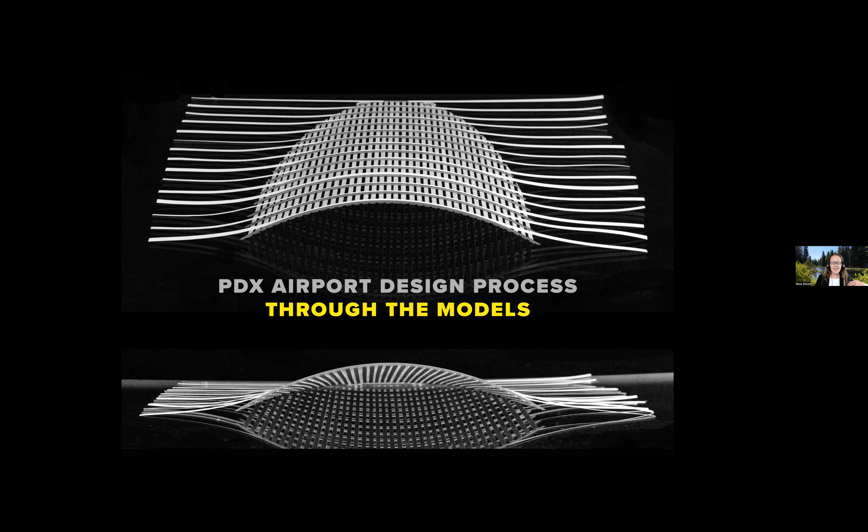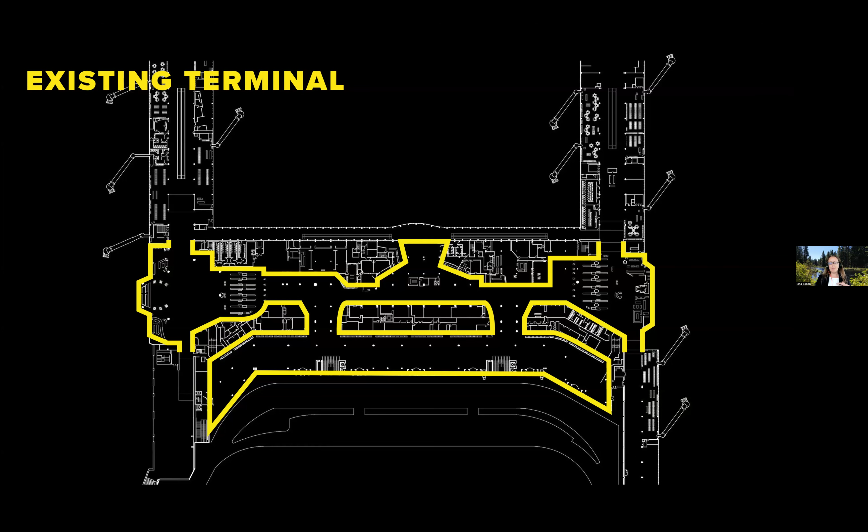The Portland Airport has been voted number one for a number of years, and the port really wanted to keep that status. So how do you take this airport that people really enjoy because it's intimate, it's got great food, and basically recreate the whole airport and add a significant amount of square footage? We were really tasked with keeping the intimacy of the existing airport and creating an experience that would reflect the region. So we developed this concept that is really a series of rooms that creates a sensory experience of a walk in the forest.

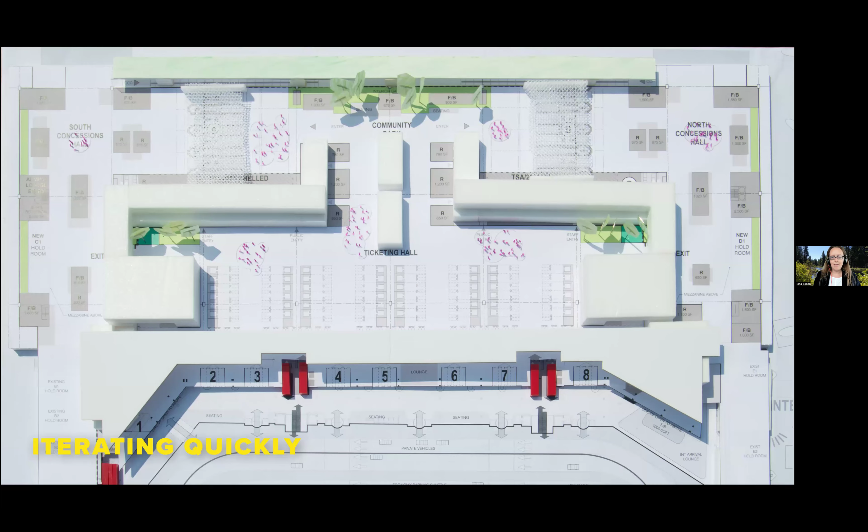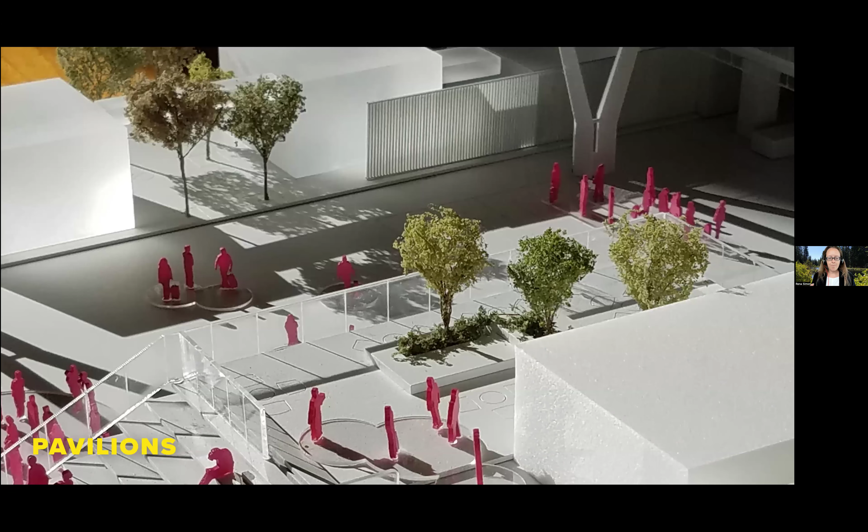We started with just some really quick iterative foam models, and we were using the program to define these rooms and look to our city, Portland, as a city of parks for inspiration of thinking about the scale of these spaces - Director Park, Pioneer Square. These really started to inform the size of those rooms. And also thinking about the intimacy of some of Portland's great streets and how the trees, the urban furniture if you will, starts to break down that scale even further.

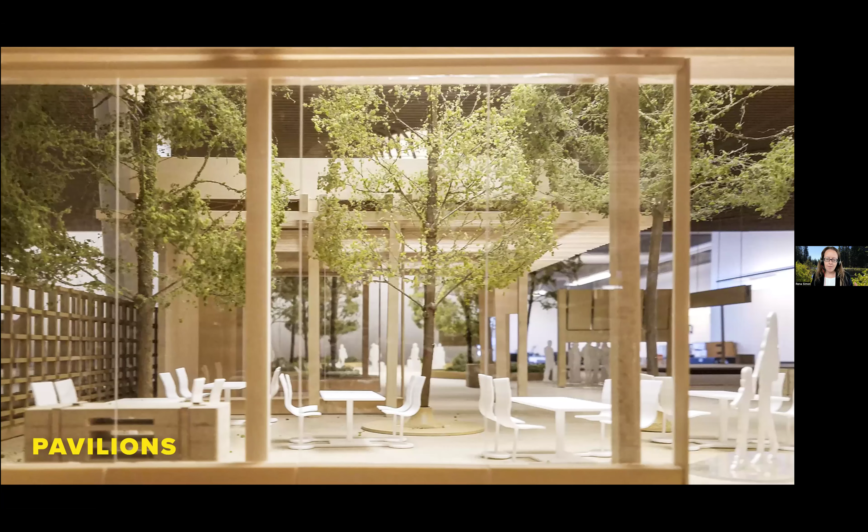And what's kind of fun, if you look at this model closely, it's actually doubled in size by a mirror. We only built half of the airport and used a mirror to create the full experience there of this kind of parkscape.

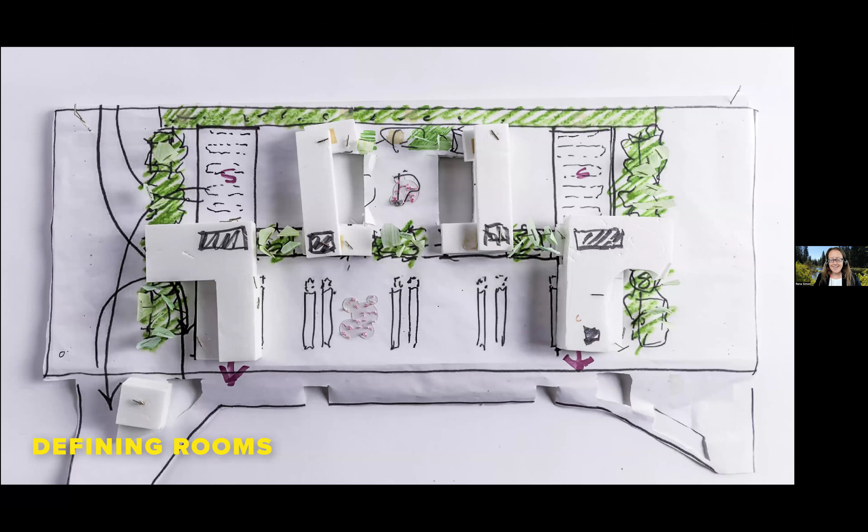But as we were working through these models, we discovered that this insertion of these biophilic experiences could also, not just define the edge of the rooms, but also start to synergize in its location with some of the highest points of stress in the airport - so security queuing, or even when you're trying to put your shoes on, coming out of security. So we started to define these rooms.

And something else that came about in this process was identifying this seam. No one's going to know what we're talking about now when we say the word seam, but if you were to figure out which words were most used on the project, seam was probably one of those. Really what it was is this threshold between the existing foundation and this new expansion foundation. That was a zone where we could bring up MEP systems, insert some of these larger trees, and really was this strong threshold we wanted to create between the room of the ticket hall and the room of the market hall.

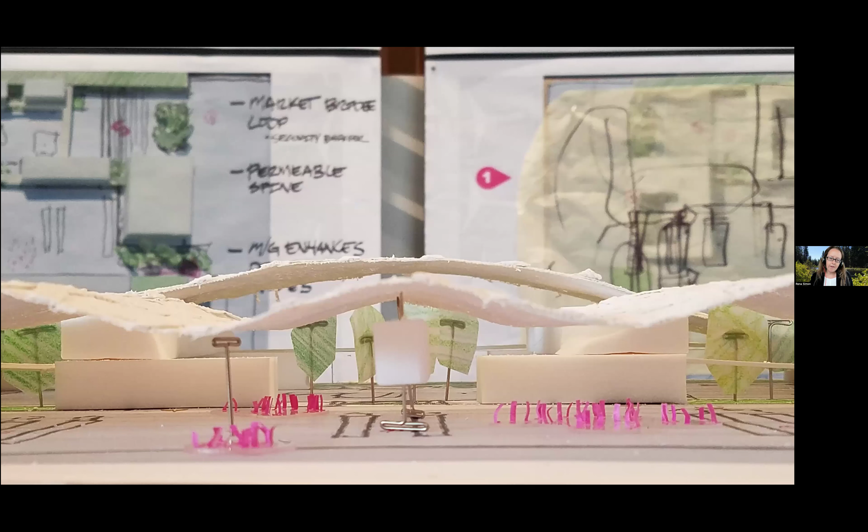But at this point, we're really just thinking, coming from the ground up, creating those rooms, and we haven't really begun to define what that roof experience would be.

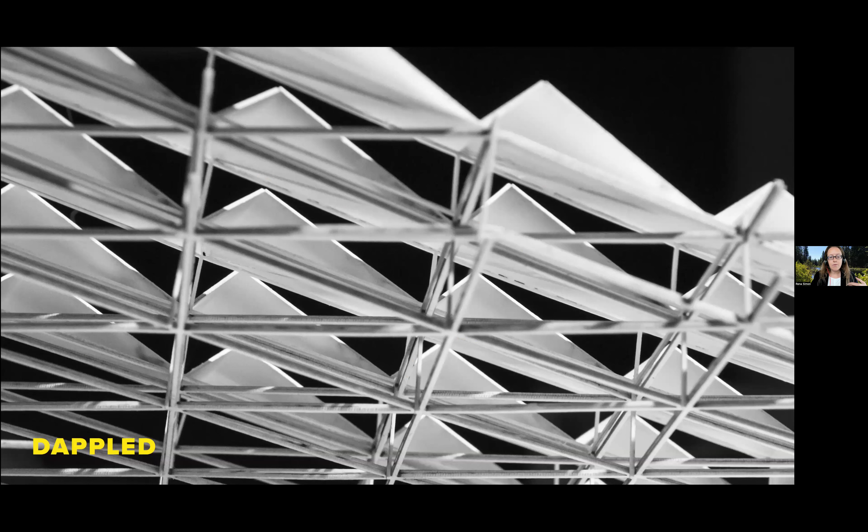So as we're starting to look at the roof and study its character, dappled light is really what we start striving to achieve with puncturing the top of that roof surface, and using these two-span systems to try to minimize the amount of columns that might have to puncture down through that haystack of stuff that needs to remain operational below.

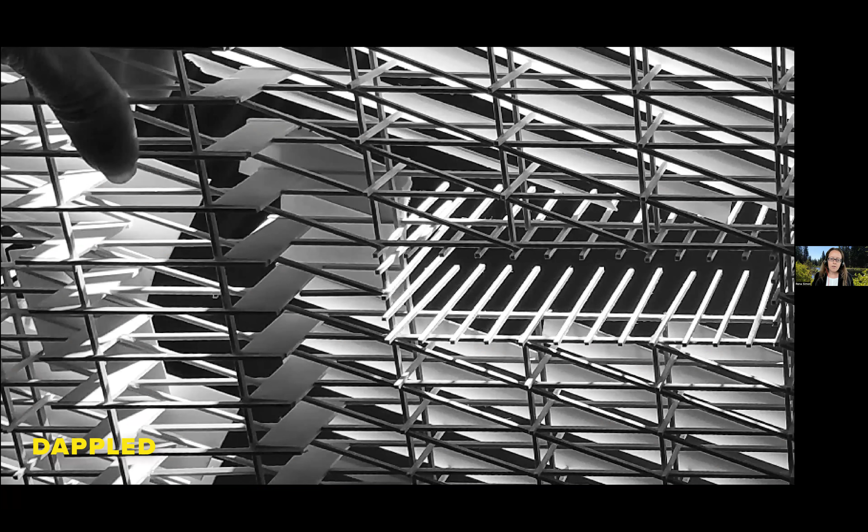One of the fundamental challenges with this kind of top side approach is that they were one directional. We wanted people to come through the ticket hall, and when you get to the market, then you're going to go right or left. We wanted that experience to be similar. So we started looking at concentrating light - not just having this blanket of dappled light fabric, but how could we puncture that roof more and create these moments of light.

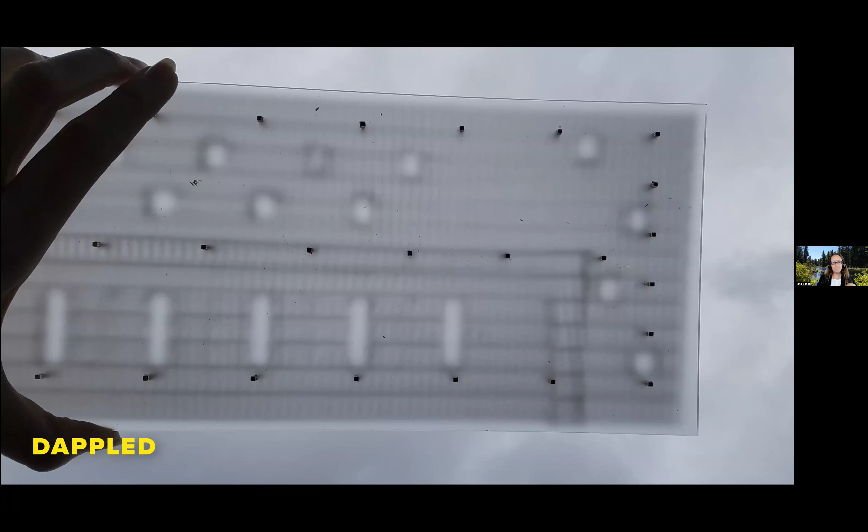And you can see here in this model that seam is starting to register.

The other challenge with that kind of dappled light only approach is that you might be creating measurable light in the space, but you're not really creating perceived light. So using surface to mitigate glare, but then also have this more visceral experience of light became really important.

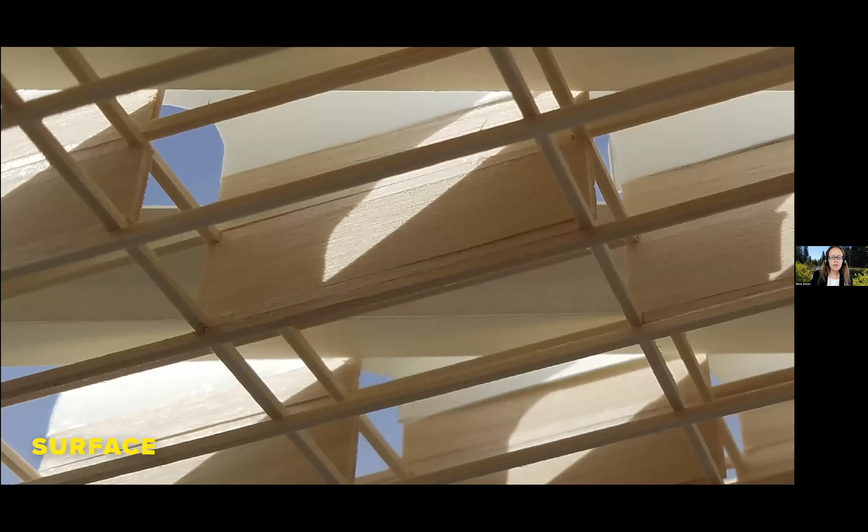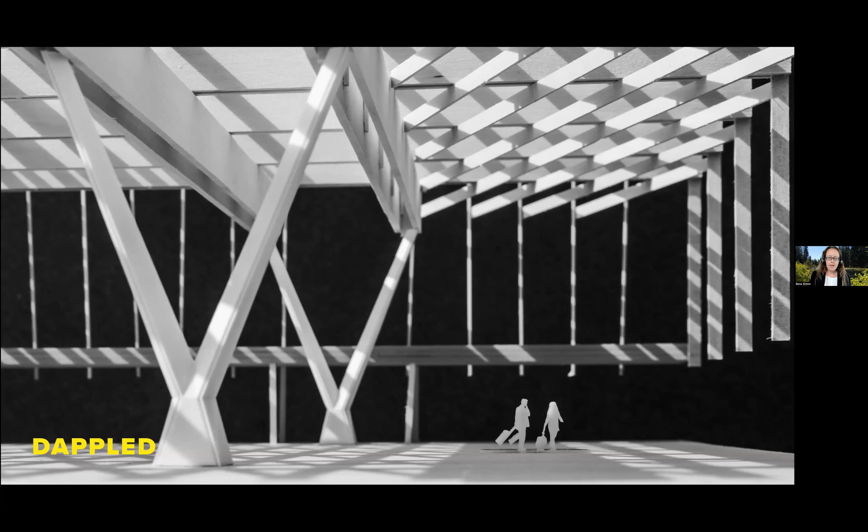So we started looking at bringing the clerestories down into the structure so that light could be cast on those surfaces, creating this dappled experience in addition to these kind of punctures of light, and even potentially integrating an additional element, so some kind of fabric.

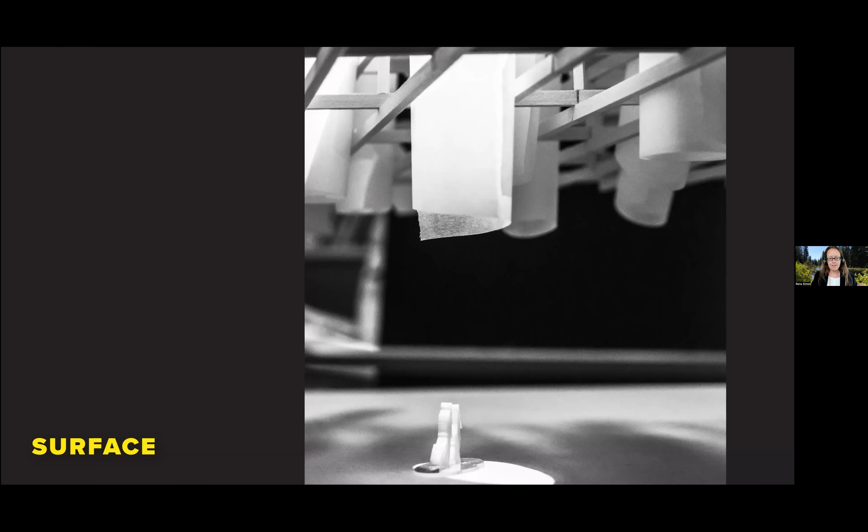We did a lot of iterations, just thinking about these light scoops. But in the end, you're adding these additional layers, it's additional cost. And so we started thinking about, is there a way that the structure could do everything all at once?

It could create these moments. It could also form the skin - so it could turn down and form the skin.

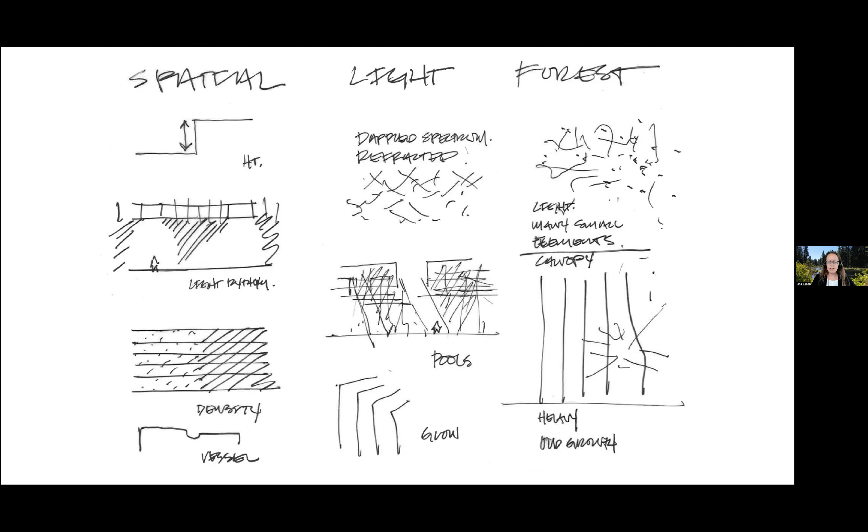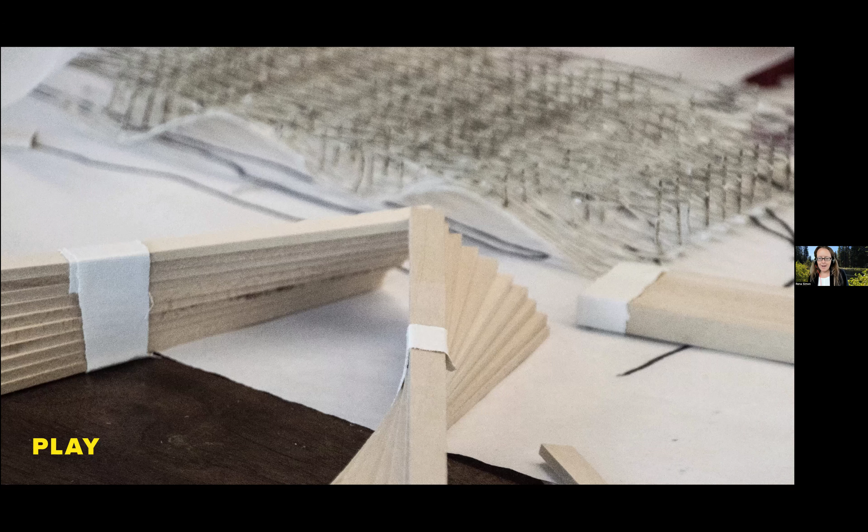So I want to take us on a little bit of a tangent here, where something I really enjoy doing is kind of setting up a framework for study and then just seeing what comes out of it. So this was just simply taking athletic tape and wrapping it around some basswood sticks and starting to twist and play, kind of twisting the glulam essentially, to play with light.

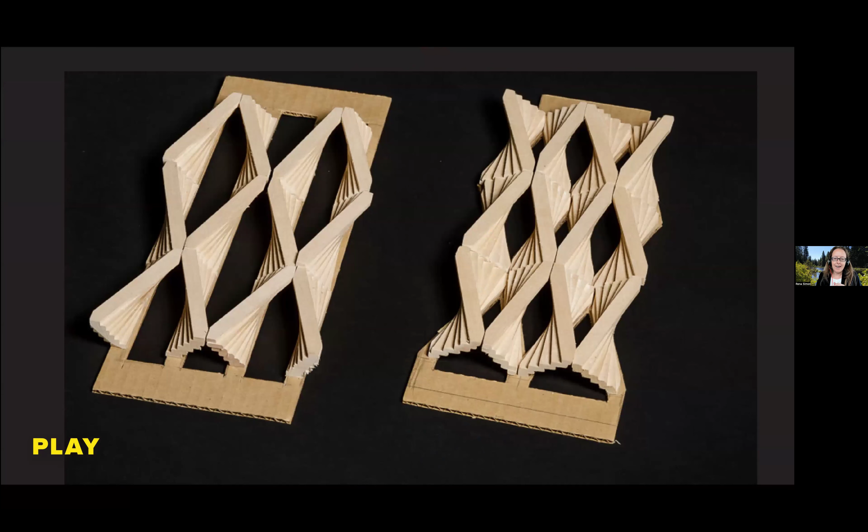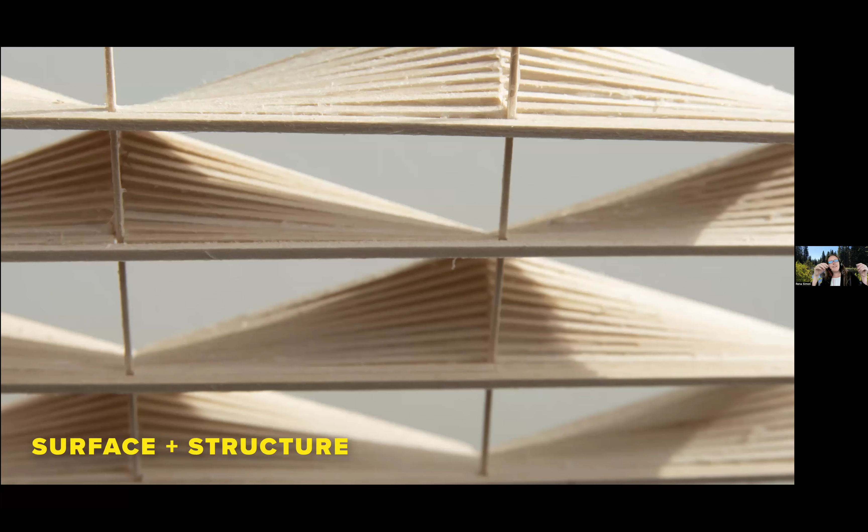But one of the beautiful discoveries in this was having this kind of structural rigor that could relate to the flow of the space below. And then with the axis of the airport being 60 degrees rotated, that top surface could twist and start to reference that east-west axis. And it was this really wonderful potential.

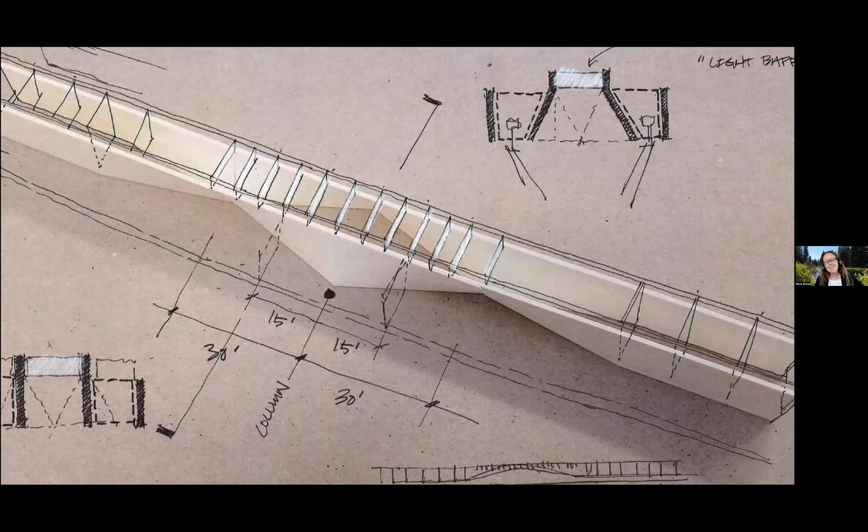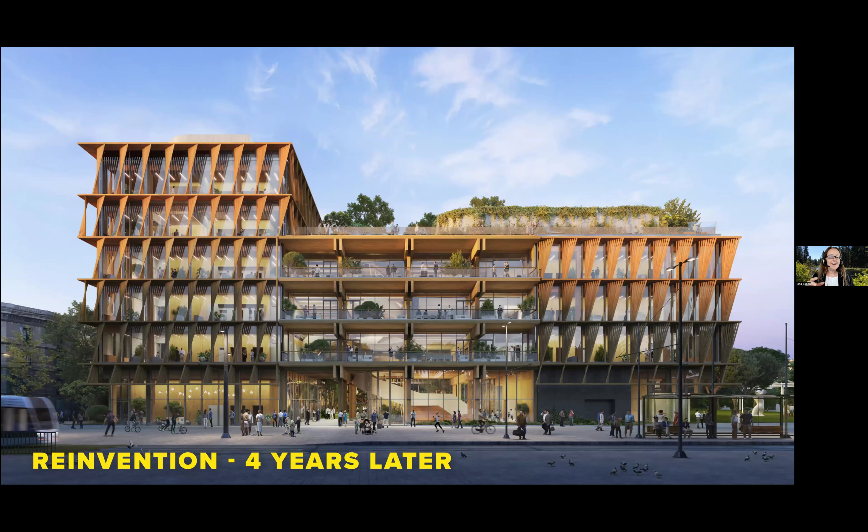And so we took it to the farthest extent we could to see if we could get it to work structurally. And in the end, we just couldn't get those laminations to function the way that they needed to. But this is one of those fun moments in design where an idea that doesn't go anywhere on a project resurfaces and you're able to kind of reinvent it on another project.

So this is a Barcelona project competition that we did a couple years ago. And so this model with this kind of straight edges that work with the building module, and of course it evolved to what you see here. But it's just a fun moment of where we had this kind of library of ideas to last a lifetime with this airport structure. So this is the first example of being able to use one of those in a new way.

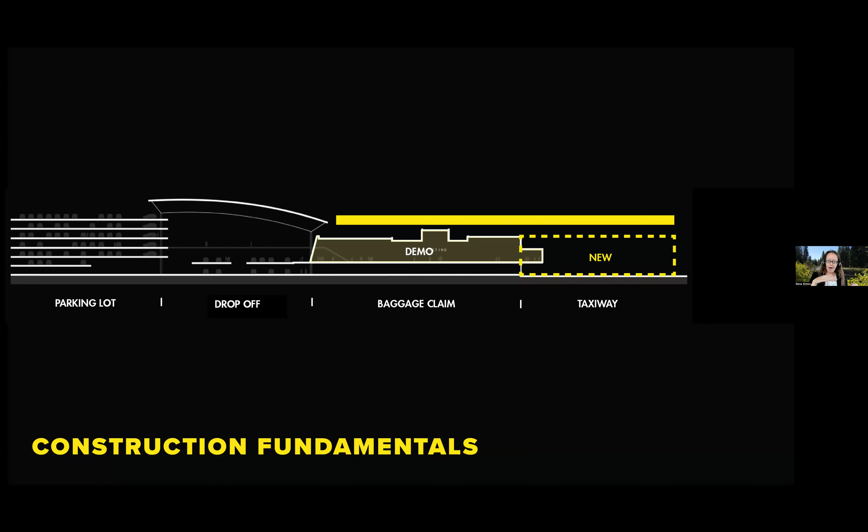So another way that we use the models was at a critical point when we decided that two-way systems weren't really going to work, in the sense that we were already kind of pushed, no pun intended, into a one-way system, having to launch the roof out over the existing structure. So this model started to communicate that - we could think of the structure as a series of cassettes that each get pushed onto these girders.

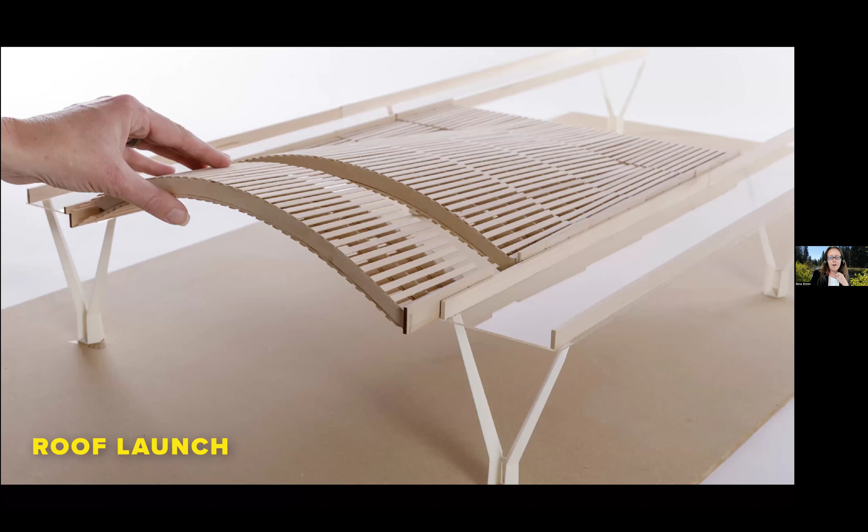And in the end, well, actually, I wanted to show how tattered this model was, because it was in almost every meeting. But in the end, we actually didn't have those smaller cassettes.

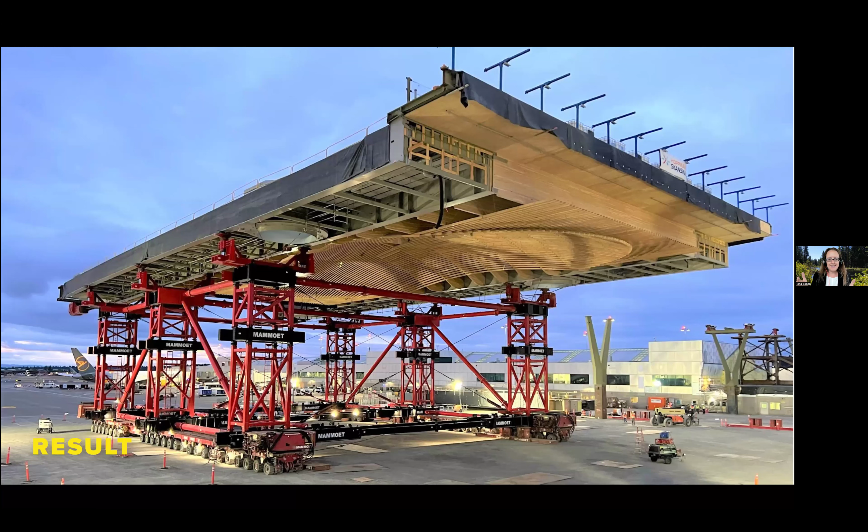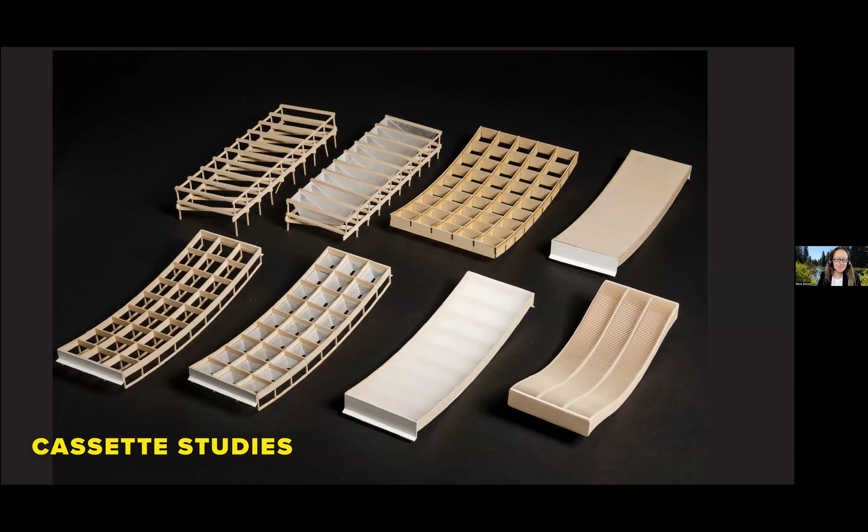We had essentially half a bay being launched at once by these Mammoet kind of Star Wars type structures. This Dutch company, they actually wanted to move the whole roof at once, but I think there were some challenges in getting enough trades folks out on site to actually get it all built in time to move it all at once. But I'm sure there's many other reasons too. But this started to set up a framework of the structure where we're starting to study these cassette modules.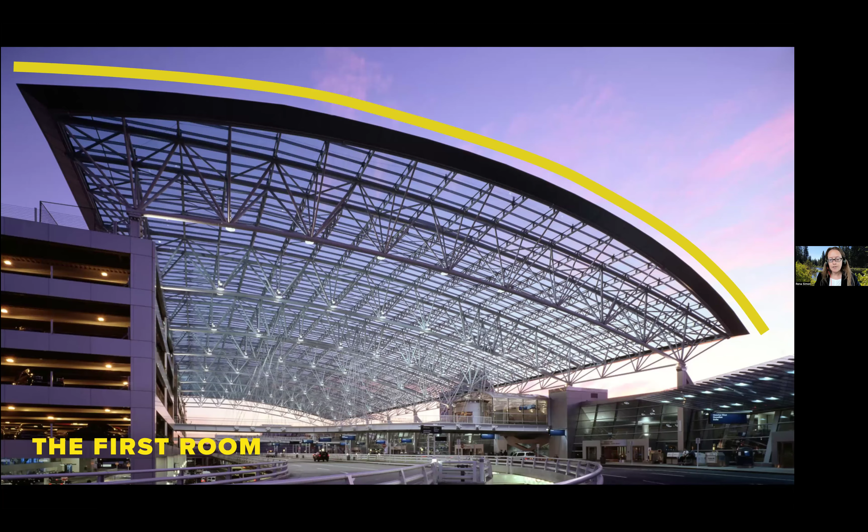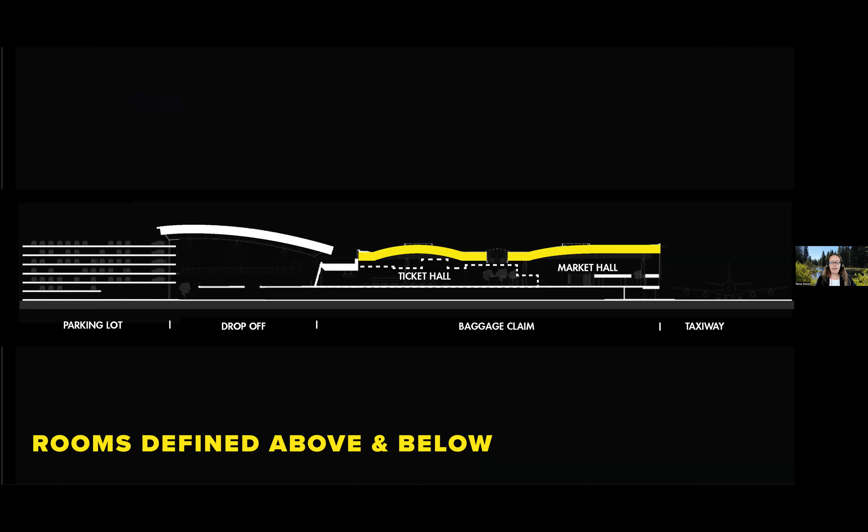And then really the first room that you experience at the airport is at the drop-off with the canopy. And the form of that roof was the inspiration to start looking at how the roof could shape itself, not just to deal with water or certain other challenges, but also to start to create that intimate scale. So starting to shape the roof to define these rooms.

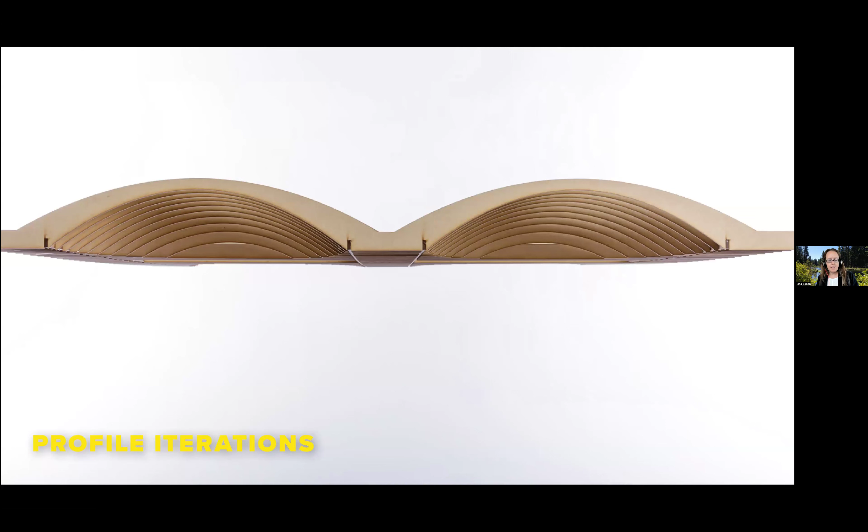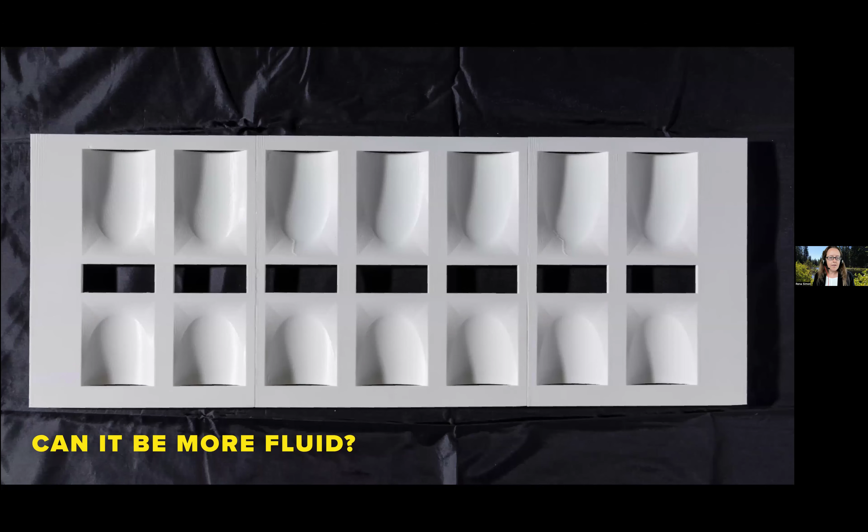And so we did a lot of back and forth between the computer and models to test the beam profiles and what were these forms that we were creating. And we had a presentation check-in with the port with these models. And the two main pieces of feedback we got is there was some concern about these vaults and the amount of light that would come into the ticket lobby. And there was also a question of, could it be more of a fluid shape?

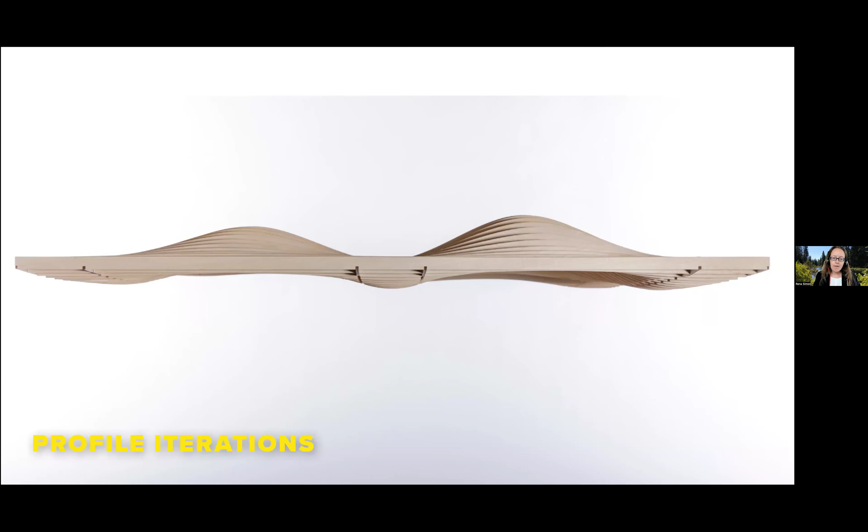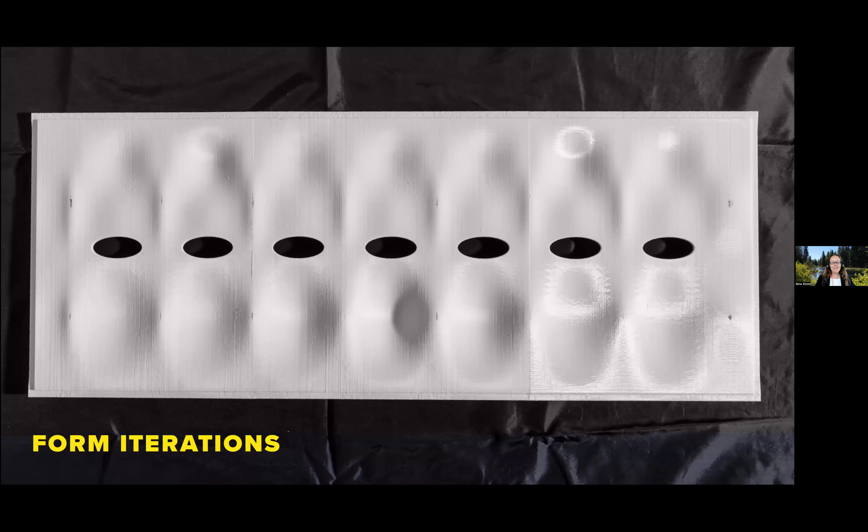So we started to iterate on that and develop this language of the domes in addition to these more vaulted open forms. And so we got a little wild there for a minute, going above and below the girder, and ultimately settled on these two kind of vocabularies of the vault and the dome to start to form those rooms.

And there was this moment in the process where there was some struggle to try to understand what that beam profile should be. And so this model did a lot of that work to kind of get the computer to fall in line with what we were trying to create. So this was just grabbing a giant piece of Plex that was in the model shop, and stealing a piece off of one of the older model iterations and just laying some strips of paper on top of it. So it became a kind of a pivot point where it felt like we were starting to test out the realities of what the design would be.

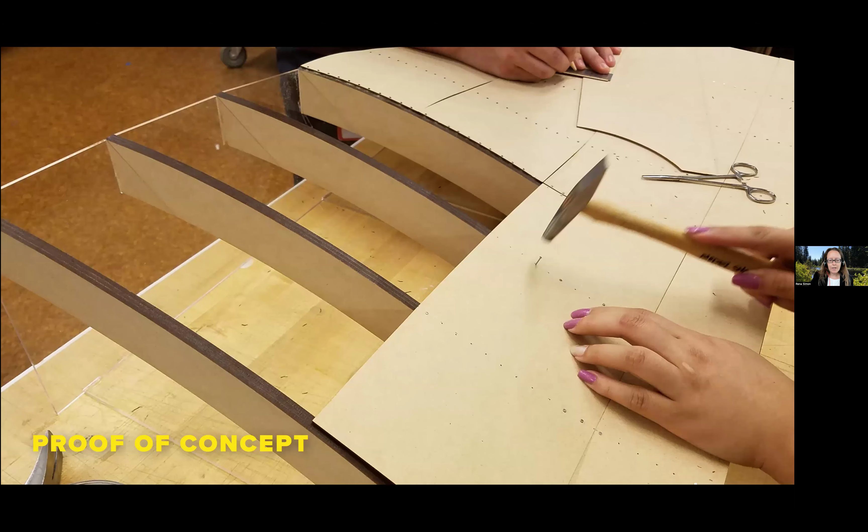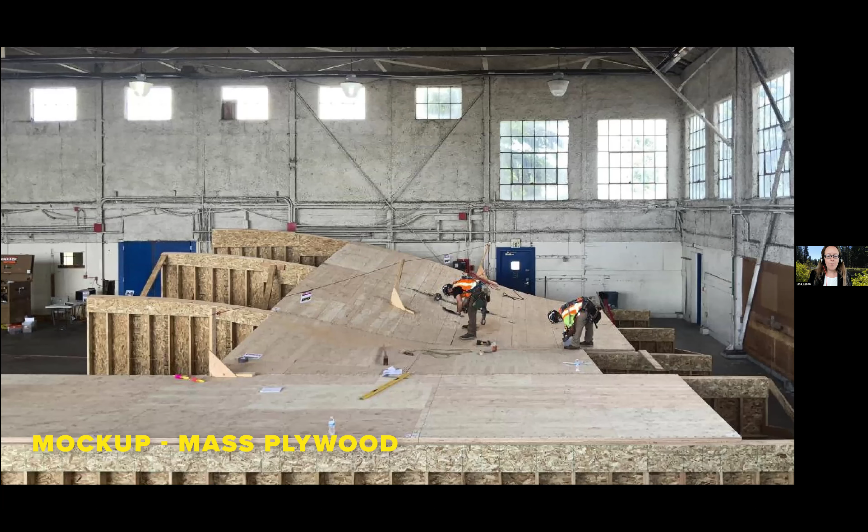And that included how this form and the diaphragm would be constructed on top. And so this sequence of photos are some of my favorites, because here we are in the model shop, and our great model shop team is pounding these tiny little brads into the diaphragm, into these mass plywood flat panels, to test how we are going to shape these over the form. And then cut to the actual real life-size mock-up that's done in one of the Portland warehouses.

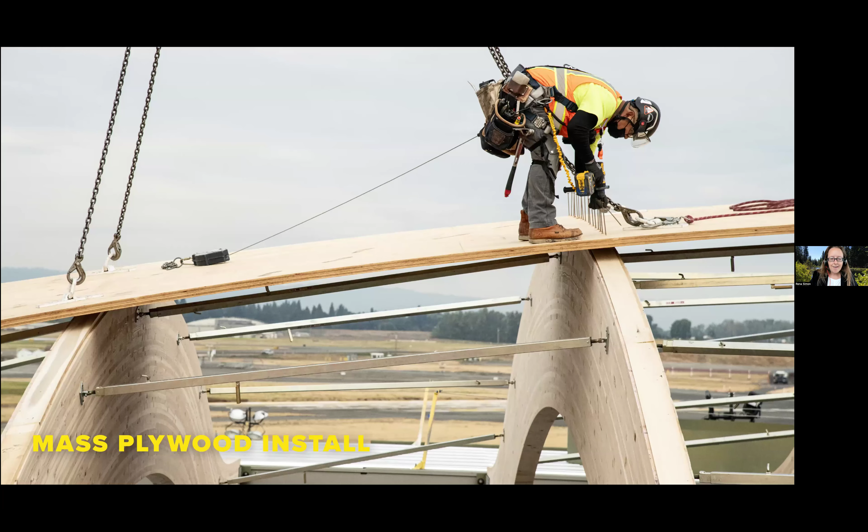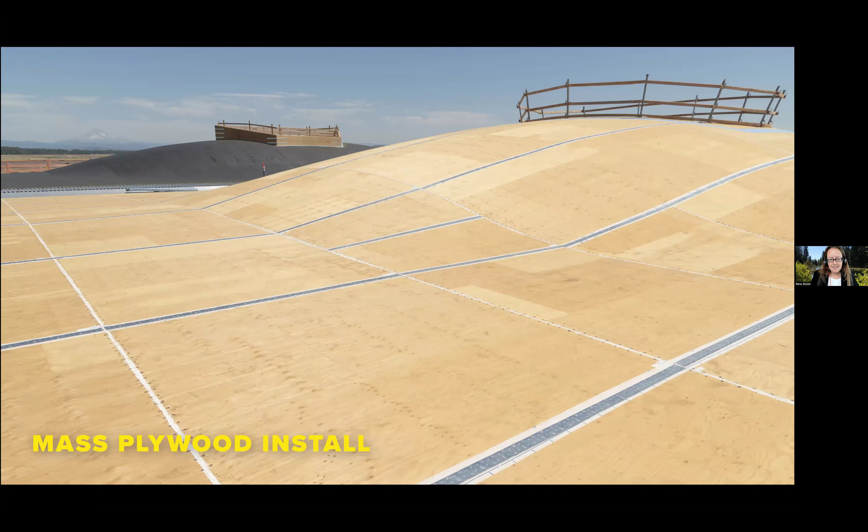And then taking that further onto the field, these giant screws that they're using to secure these mass plywood panels down to the beams in that fabrication airfield. It kind of ends up almost looking like a sand dune here in the end.

But before I get to the last chapter here, I want to digress a little bit and talk about time, because on this project, we did do a ton of models. I'm really only showing you a fraction here today, and we had this great team, both the design team, our model shop team, and some of those team members were dedicated entirely to this project. And then we also brought in Superfab, and they helped collaborate on this model building, but they've also done some great work in the airport itself too. It's another story for another time.

But when you think about time, a lot of times people are saying, oh, we don't have time for a model on this project, or the client's not paying us to do a model. And what I like to encourage folks to do is just not make the models so precious, and think of them as ways to generate ideas. And there's a number of ways that I've thought of them over the years, and why they're useful and how they can be more easily created on projects that don't necessarily have this luxury of time.

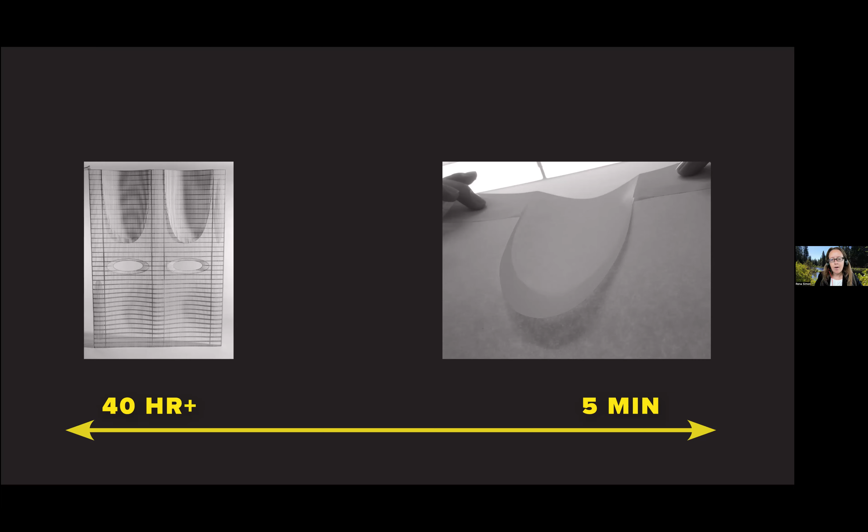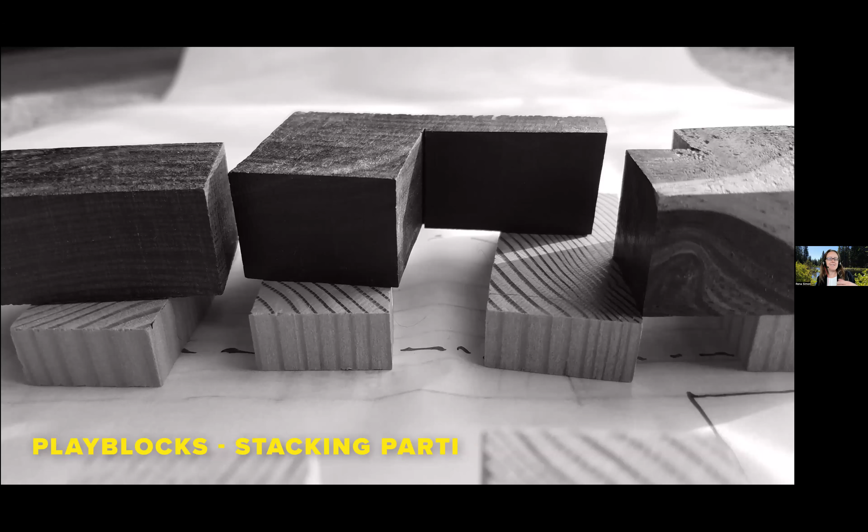So these three projects I'll share here are using what I call my play blocks. It's just a stack of scraps, basically, that I took from the model shop. And there's a few pieces actually from college years mixed in here. But it just allows you to immediately start thinking in 3D. And not being too precious about it means that some of these blocks may not be exactly the right scale, or you may not have enough of them, but you can get started on an idea. And as long as you don't fall in love too much with the proportions of something, it can be a great way to just get ideas flowing.

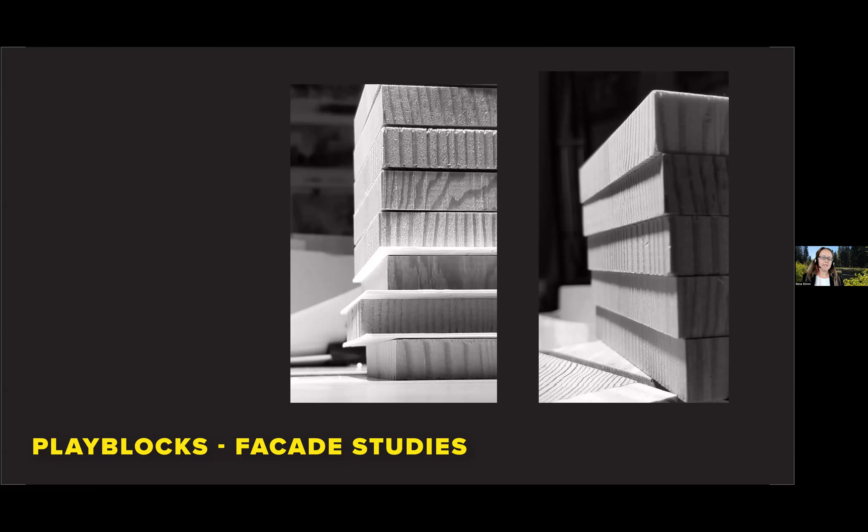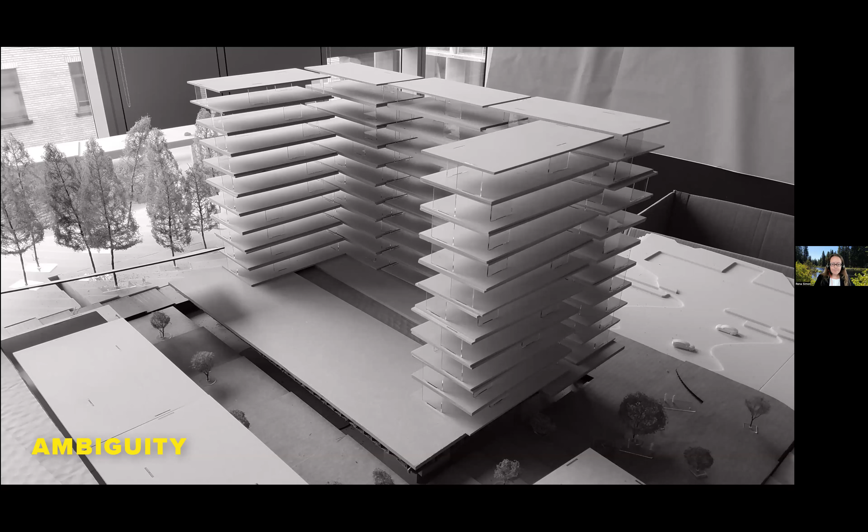The other thing that models do is they create just the right amount of ambiguity. So when a render might be considered too austere because we haven't thought about the spaces beyond the glazing, or we haven't layered in all the furniture or even the people in a space, it can be austere for folks. I think there's a pressure sometimes to add more stuff than is needed in a project.

And so using models, and this example is a little bit, there was a little more effort into creating these modules ahead of time. But it allowed us to create 3 concepts very quickly. That was kind of a 15-minute span of what you saw just there. But it also photographed well, and could convey an idea without all the pressures of a rendering.

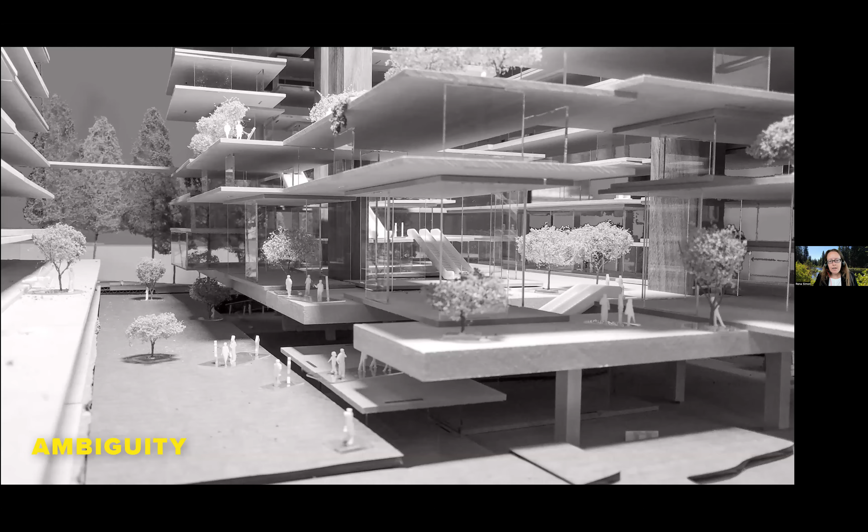And so that ambiguity, these are all images that have been used in client presentations. So it's a quick, rough way to get an idea expressed without all that additional pressure.

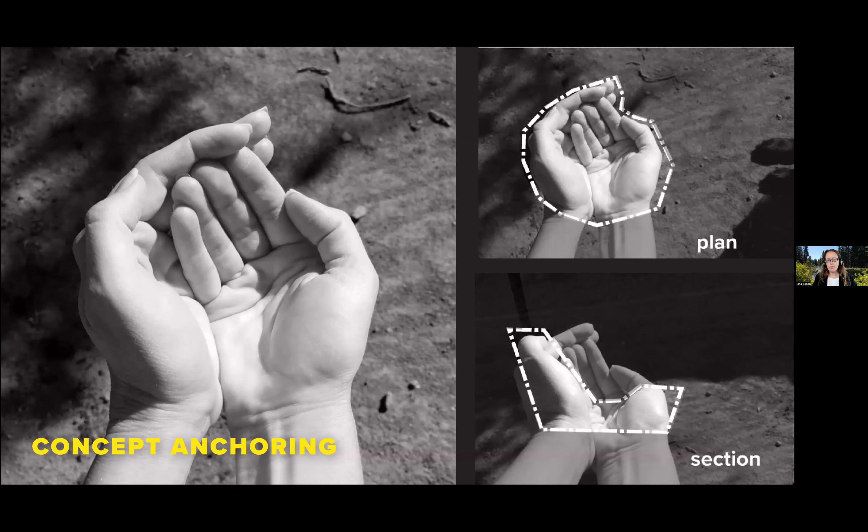And then the kind of last point on this tangent is about anchoring the concept. So having something that the team can return to as you go down the rabbit hole of different design studies and pressures that surround design. It's something that you can come back to that communicates clarity.

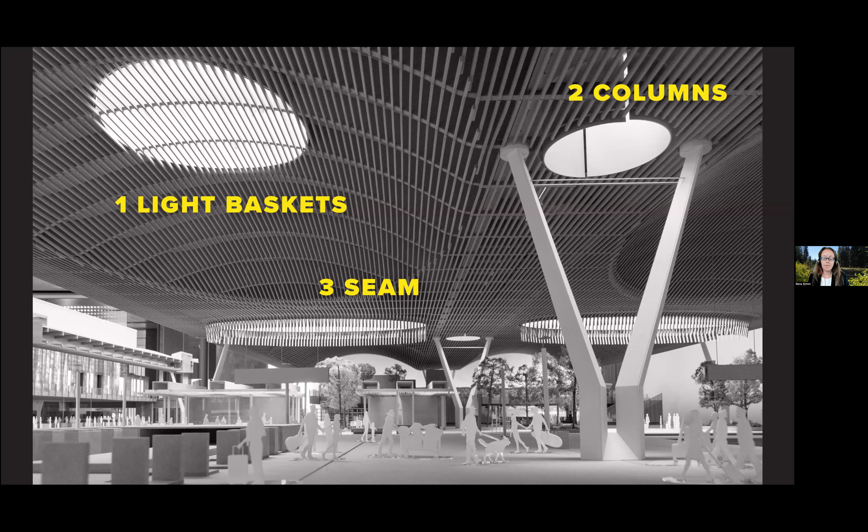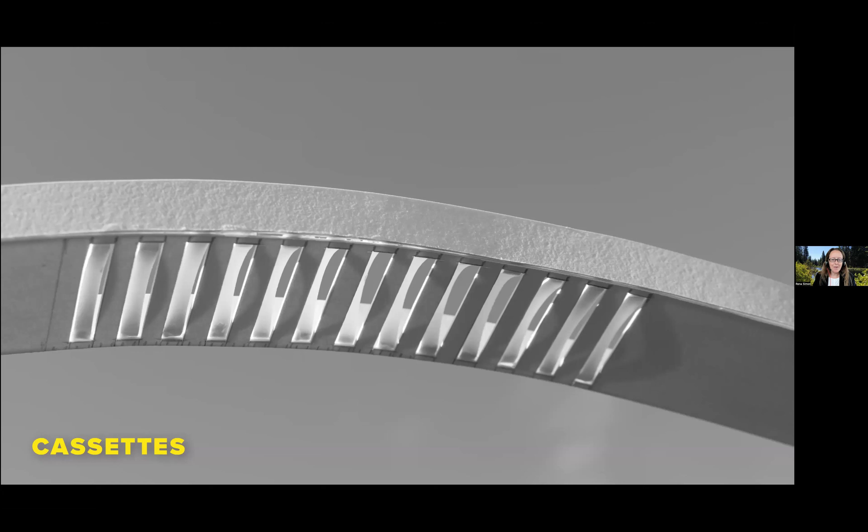So this last chapter that I'll share is going a bit deeper into how we fine-tuned the daylight in that roof expression. So starting here with the light baskets, and then the points of light at the columns, and then ending with the seam. So we started calling these light baskets, and developing these cassettes, this modularity. But then what kind of light patterns could we create with this kind of basketry?

So we jumped in scale. Here's Disha, one of my great partners in crime. Inside of this, I think we went from 1/8 inch to 1 inch equals a foot. So this is just one dome that we're modeling here.

But this idea of the basket, this is an example of making a quick basswood model just by soaking thin strips of basswood, taking a photo, superimposing it, flipping it, sketching over it. So starting to create this imagery to evoke how we want the light to come through these vaults in domes.

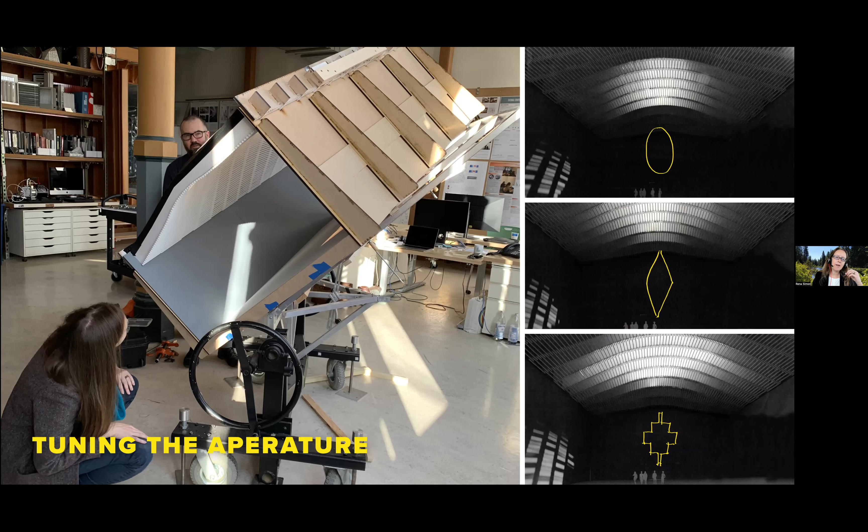And then we took this model to the U of O Light Lab. And some of the discoveries that came out of this was understanding that we needed to create more definition in how we shaped that light opening in the dome. This was the other thing that the vaulted forms did for us as opposed to the flat roof, is it allowed us to be a bit more judicious with the skylights.

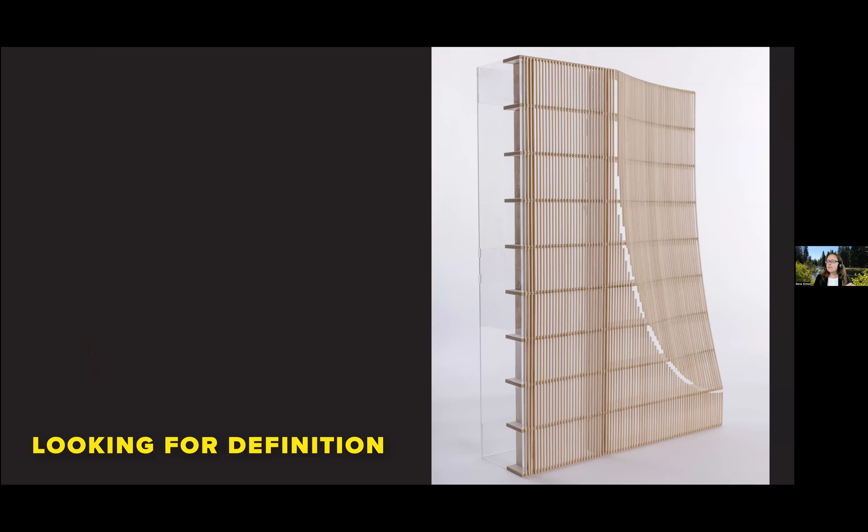But then creating that definition, defining that light shape at the top, we were losing the definition of the light baskets in this kind of fluid form. So we started looking for that definition, and it's kind of crazy to think about how elusive it was for a while when the answer was so simple.

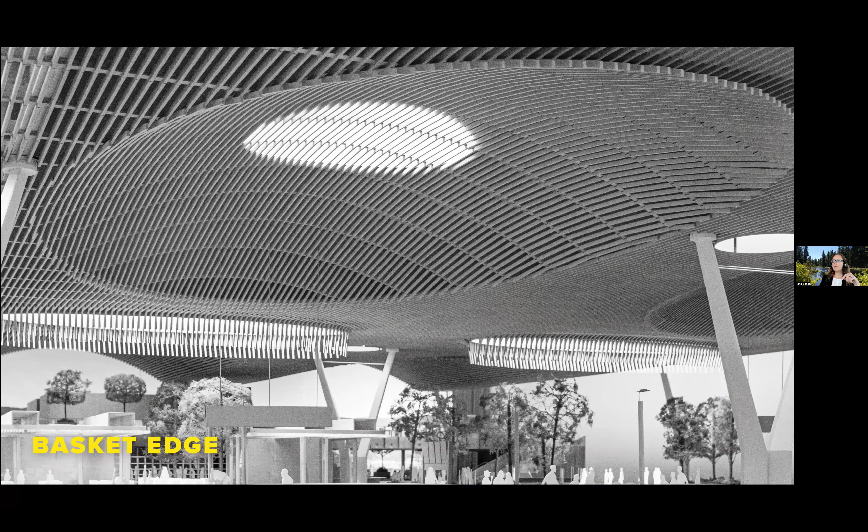But this is one of those serendipitous moments where I walked into the model shop. They were building this kind of edge definition model that had this gap, but just picking up a few scrap sticks of basswood, you can see the barcodes there. It's like, oh, all we have to do is just offset the lattice and let it slip through to form that basket edge.

And it's one of those moments where I think it's an example of where the precision of the computer kind of limits your thinking, and that you're thinking everything has to remain on center and in a perfect position. And this was really not just offsetting that lattice, but what you can see here, it's not even centered within that offset.

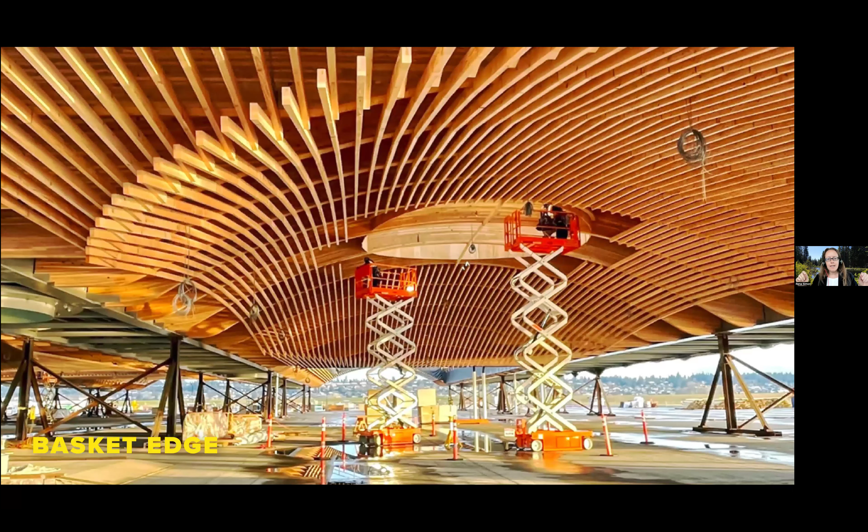And so it took a while for us to actually get the computer form of this light basket to look right. We had to kind of model it by hand. And then because this 80-foot wide basket is not technically on center, the edges of these cut pieces of the lattice are not actually symmetrical. So it's just a moment of where the hand kind of knows better, at least for a while, than the computer.

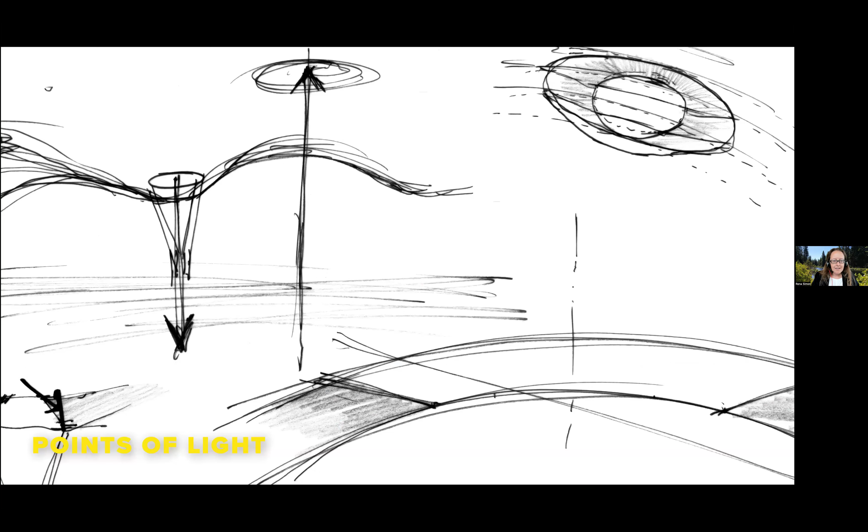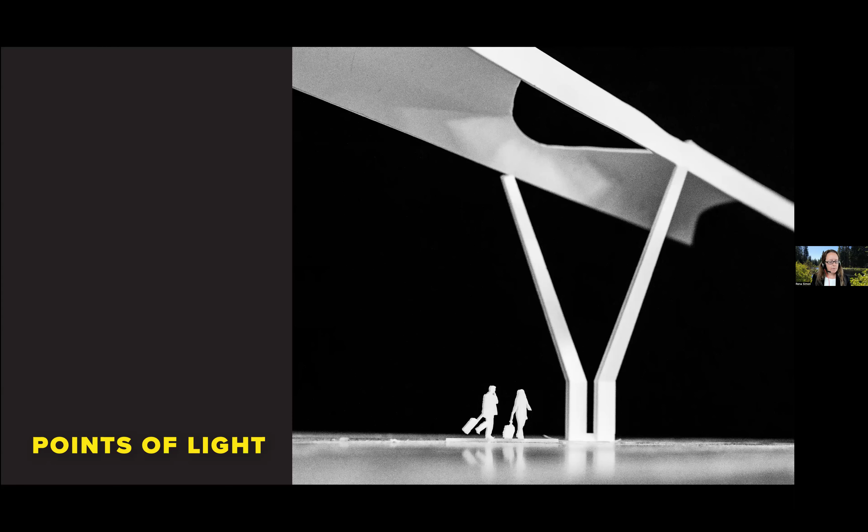And then, coming to the columns, we have these vaulted forms of light, but then the column is really this kind of anchoring point. And as we started to move away from expressing the girder zone, the moment of light above those columns became really simplified, and just the points of light that you see there today.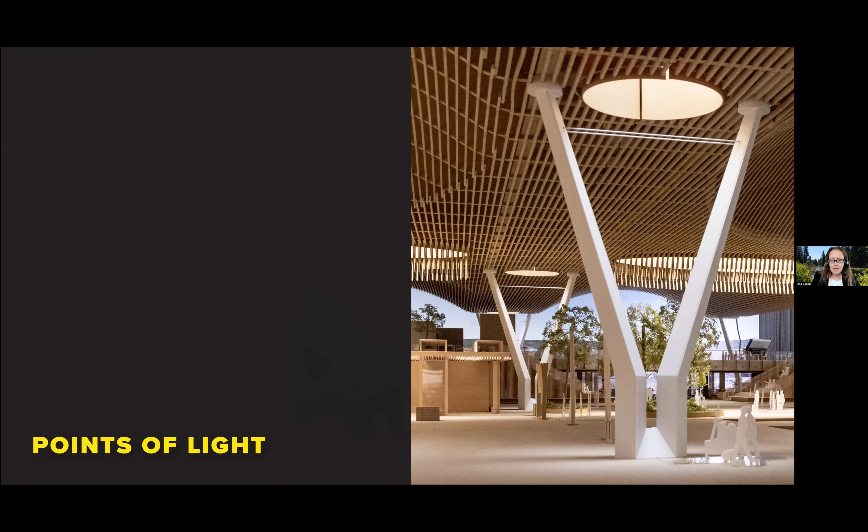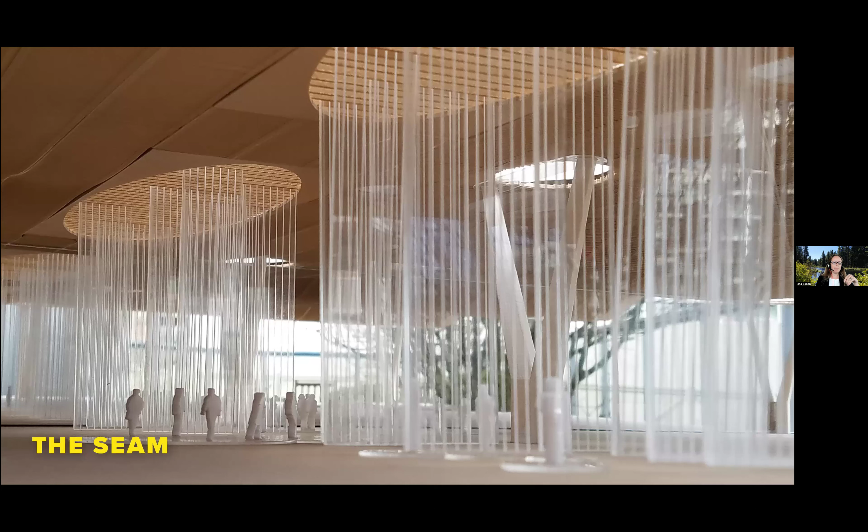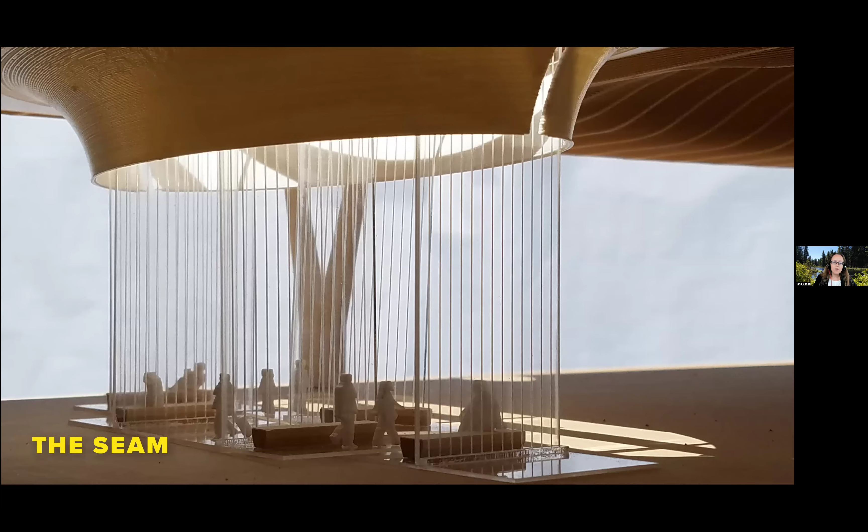And then the last piece here is looking at that seam, which, like I said, that term doesn't really make any sense anymore. But we wanted this to be a strong threshold of light, and starting to bring it into that more fluid shape of the forms. We looked at bringing vines down within that space, so you'd have these lit vines, and then also starting to look at how the roof could actually turn down at these thresholds to further emphasize that definition of the rooms, but start to create this kind of definition with light as well.

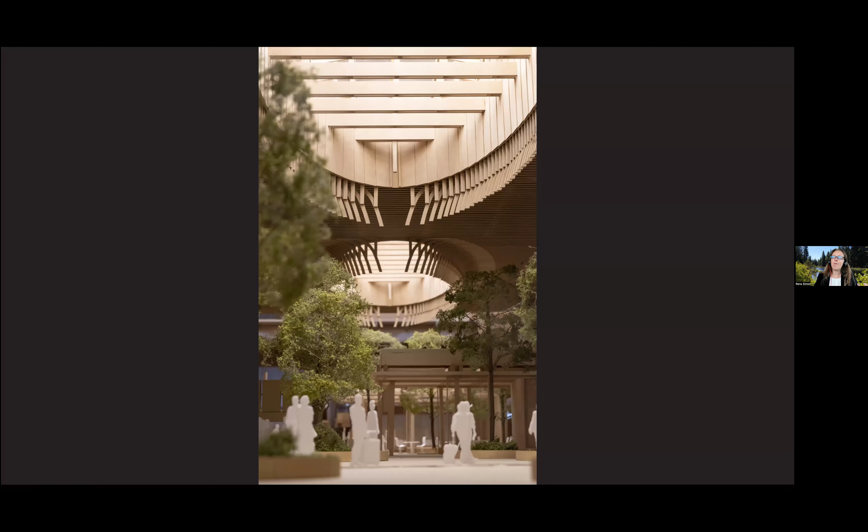Thank you so much, Rena. That was incredible. Kind of insight under the hood to the whole process of this wonderful civic space that we have for the city now. But a special insight. So we'd like to invite you all to either raise your hand or go ahead and put any questions in the chat, and Fiona, my colleague, can help facilitate any questions.

Rena, while we're waiting for some questions to come in, I was hoping maybe you could step back for a minute and just paint a picture for us. When your team was brought in, what were the primary goals of the airport redesign, and working with the Port, what was their view here? Just give us the big picture of how you got to this beautiful product. What shaped that?